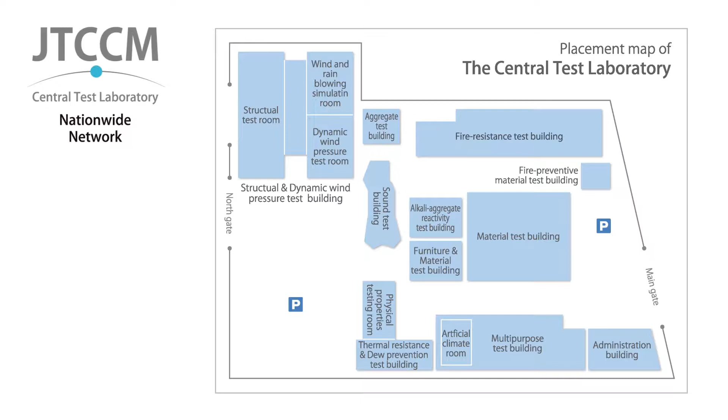There are several features of which we are particularly proud. One is that we conduct fair and highly reliable testing, the reason why we have been highly evaluated and trusted by our customers for such a long time as a third-party testing institution.

The second is that we offer a wide variety of testing options on our menu. We not only respond to customers with versatile requirements, but offer one-stop solutions through a quick response system and keen partnerships and cooperation with 4 specialized testing areas of materials, structure, fire resistance and environment.

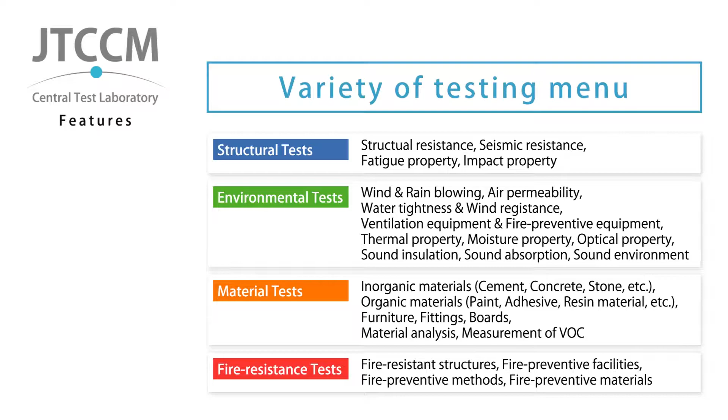The third is our reinforced testing facilities. As we have been required to conduct tests of larger and more diverse cases in recent years, we added a structural testing building and dynamic wind pressure testing building to meet testing requirements on an even greater scale.

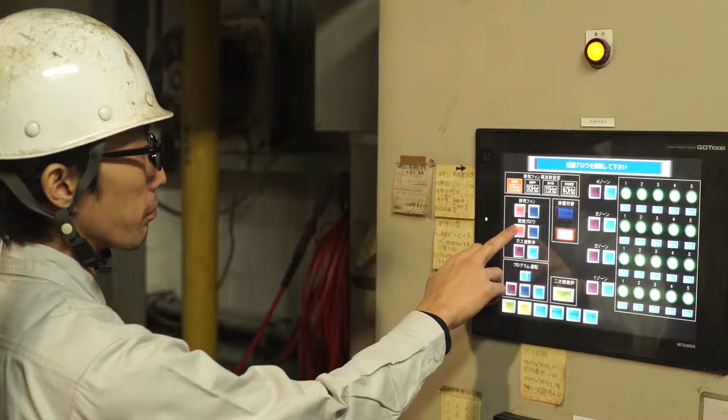Finally, it's about our skilled and experienced staff of engineers. They do their best to provide high-quality service by studying at various in-house training classes and for obtaining higher professional qualifications and academic presentations.

Next, let us guide you through our testing scenes, from the structural group, the environmental group, the material group, then finally to the fire resistance group.

The structural group deals with strength tests on large-size construction materials, components and joint components. In October 2016, we completed a new testing site, twice the size of the original one, and it has been in operation since April 2017.

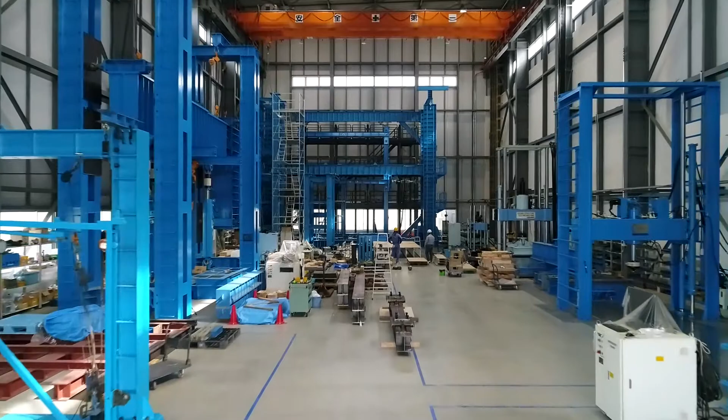We will introduce various strength tests on main structural members.

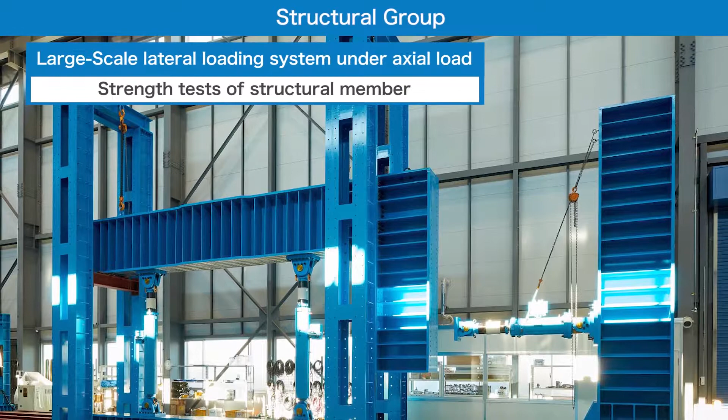The large-scale lateral loading system under axial load is used for structural members, joint components and frames applied to large-size buildings, such as reinforced concrete structures. A maximum of 5,000 kilonewtons in a vertical direction and 2,000 kilonewtons in a horizontal direction are capable of loads.

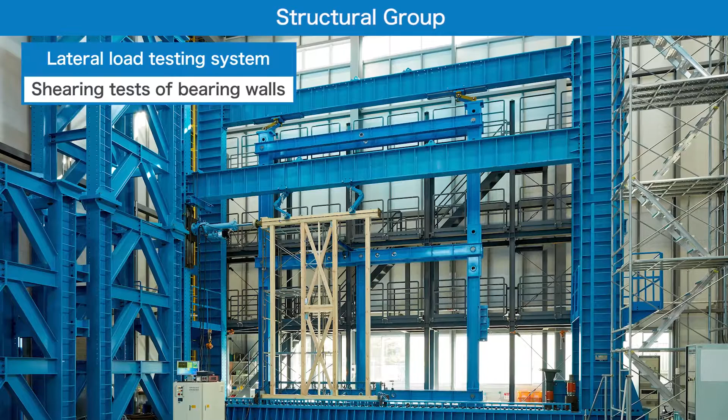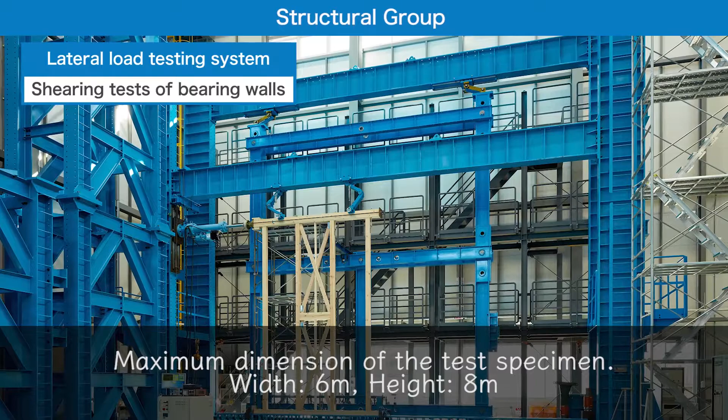For shearing tests of bearing walls over 3.3 meters in height, a lateral load testing system is used. It allows performance up to a height of 8 meters and a width of 6 meters. The horizontal load allows a maximum of 500 kilonewtons with static tests, while the dynamic tests allow up to 100 kilonewtons.

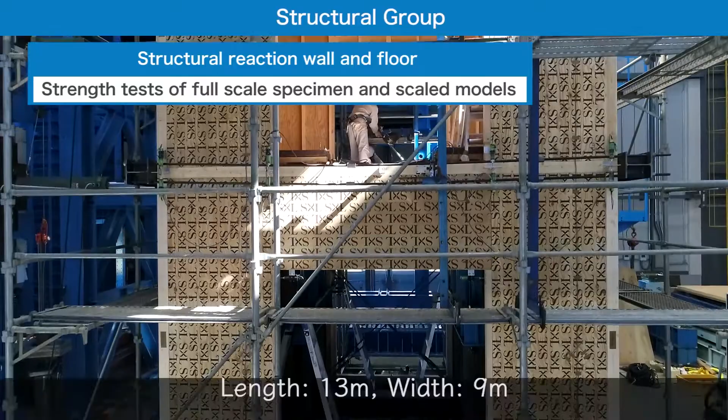A strength test on 2-story type of test specimens is performed using the structural reaction wall and floor. The structural reaction floors occupy an area of 13 meters by 9 meters. It can assemble reaction walls for various requirements by clients.

A testing system for wooden structures is used for shearing tests of wooden bearing walls requiring government certification. This testing system, due to its 3-dimensional structure frame, can be extensively used for horizontal pressure tests on ceiling units for compliance with technical standards on ceiling poles or handrails.

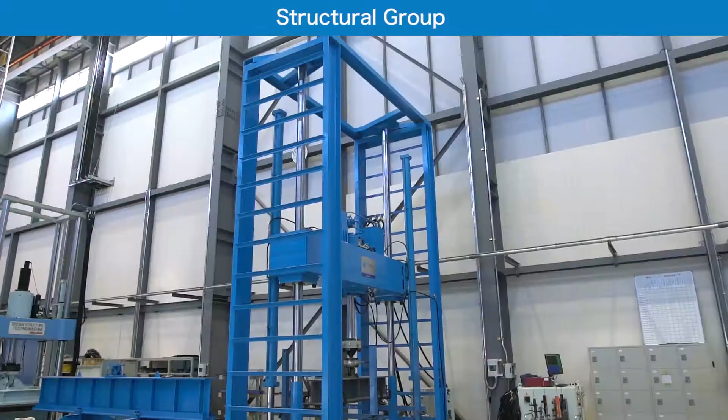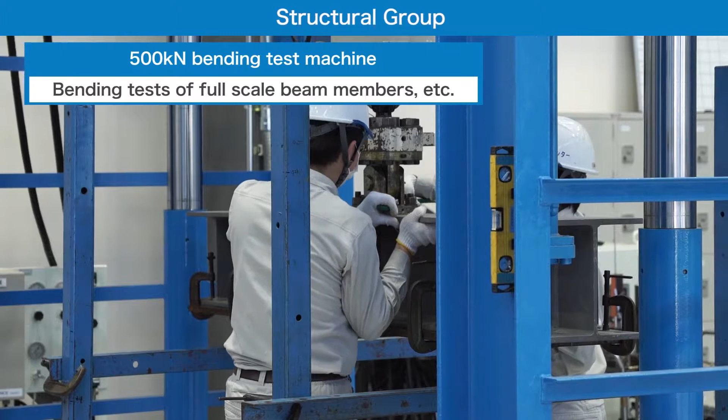A bending test of full-scale beam members, roofs, floors and wall panels is performed with a 500 kN bending test machine or 1000 kN structural test machine. The loading equipment houses a universal testing function so that it allows tensile tests on joint components and others.

A 500 kN fatigue testing machine is used for confirmation of fatigue properties such as tensile fatigue tests on steel bar joints or bend fatigue tests. It can also be applied to repetitive fatigue tests on dampers and various joint components.

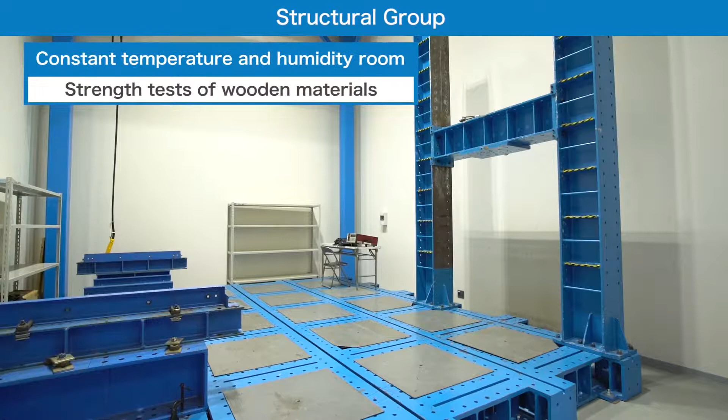A strength test on wooden materials and high polymer materials is performed in the constant temperature and humidity room, allowing standard conditions of temperature and humidity. A long-term load test can be performed on wooden materials as specified in the Building Standards Law.

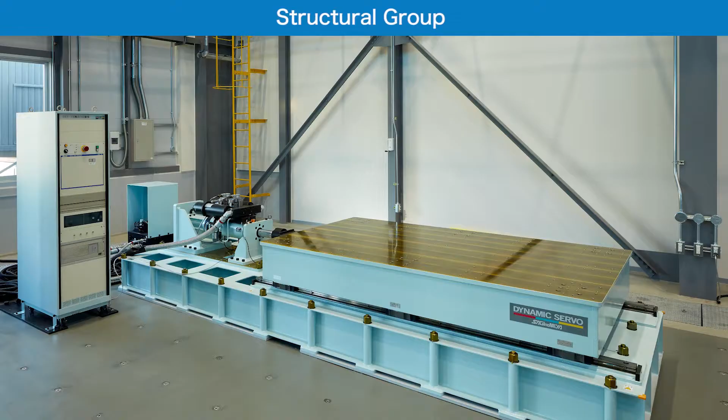Next, we will show you various safety confirmation tests for non-structural parts. A swinging pendulum impact test is performed in the shot bag testing frame for glass on the walls or adhesive films for window glazings of buildings.

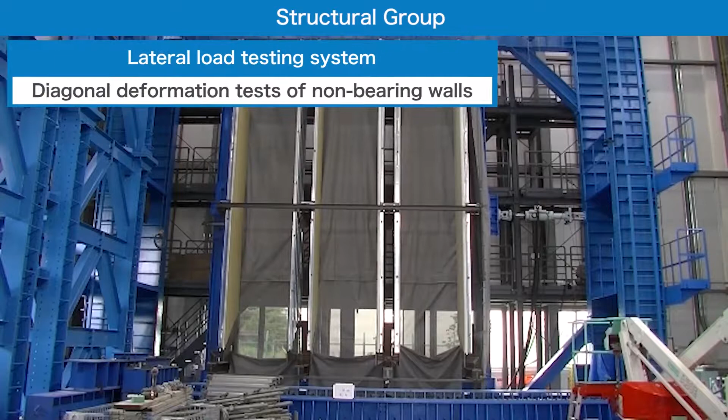The lateral load testing system is used for a diagonal deformation test of non-bearing walls, including external walls and partition walls. It can also conduct lateral dynamic tests in consideration of earthquake waves.

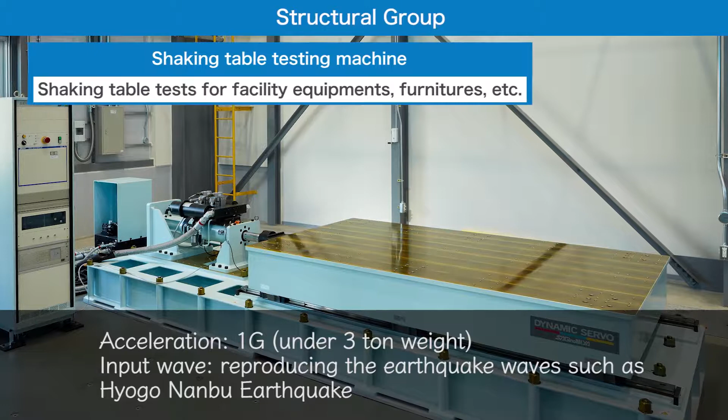A horizontal shaking table testing machine is used to test for confirmation of vibration characteristics and seismic resistance properties for raised access floors, furniture and facilities. It also performs shaking table tests in a horizontal direction at a maximum acceleration of 1 g by applying sine waves or earthquake waves.

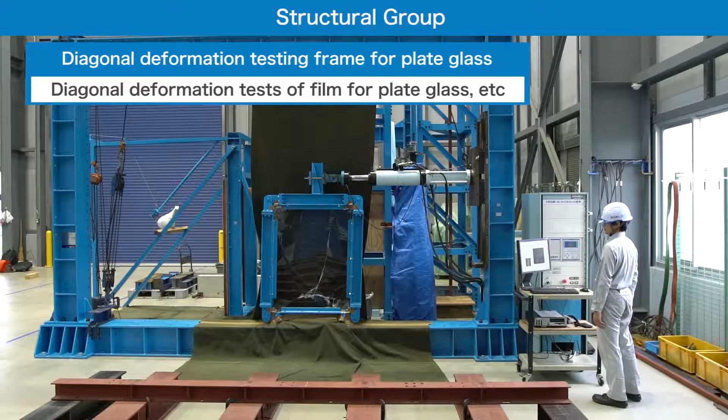A diagonal deformation test of the JIS compliant adhesive films for glazings and an in-plane displacement trackability test on door sets are performed by using a diagonal deformation testing frame for plate glass. It also performs horizontal load tests on handrails and guard fences.

The environmental group conducts tests on external natural environmental factors such as rain and wind, as well as indoor environmental issues such as heat, moisture, light and sound.

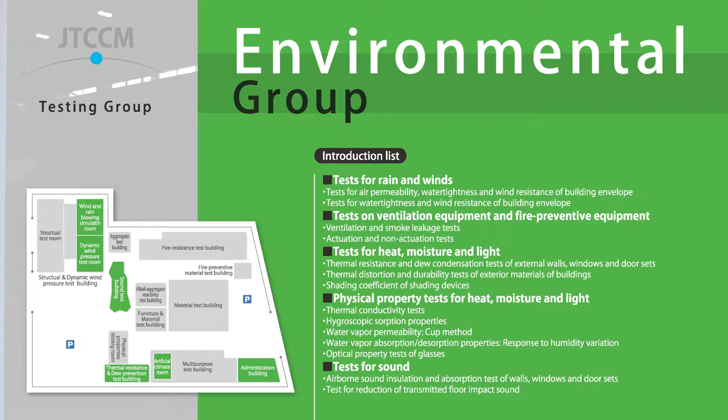In October 2016, we also built a new facility that allows tests with a natural external environment of wind and rain, thus allowing us to perform dynamic wind pressure tests with larger size test pieces than previously, as well as tests with actual winds. Let's start with the dynamic wind pressure tests on rain and wind.

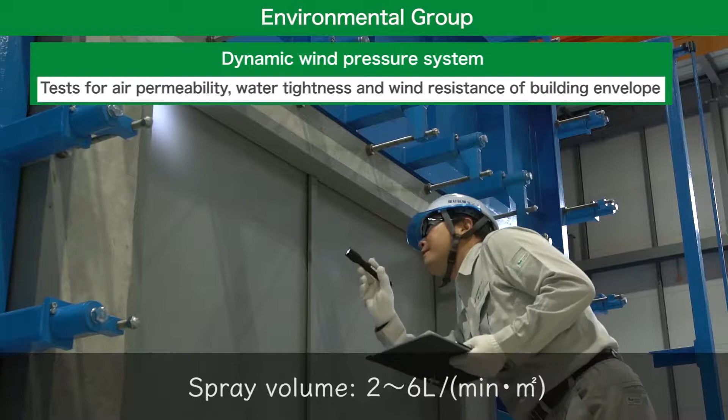The dynamic wind pressure system is used for tests for air permeability, water tightness, and wind resistance of building envelopes such as roofs, walls, windows, and door sets. A test piece of a maximum of 4 meters in height and 5 meters in width can be tested. A maximum of 10,000 pascals of load pressure will be applied, and the spray volume will be 2 to 6 liters per square meter per minute.

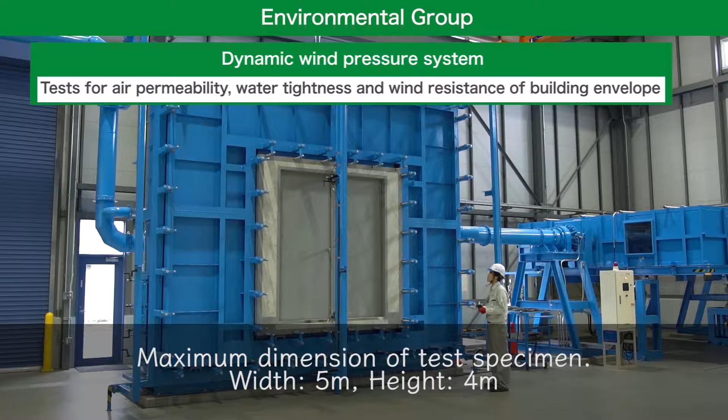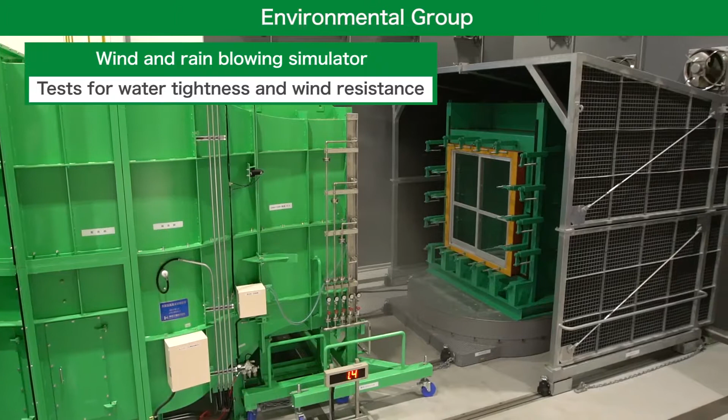Tests for water tightness and wind resistance are performed for actual winds over roofs, walls, building fixtures, solar light modules and fences using the wind and rain blowing simulator. This equipment can reproduce 3 different types of wind: steady, pulse and gust, with wind speeds that can range from 3 to 66 meters per second. The spray volume is 2 to 6 liters per square meter per minute.

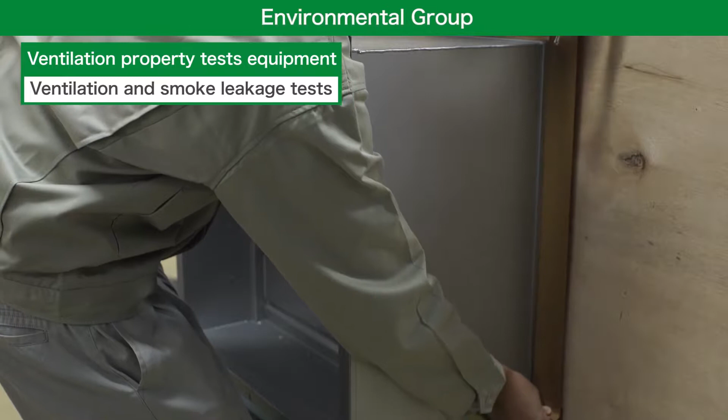Next are the tests on ventilation equipment and fire preventive equipment. For ventilation equipment such as exhaust fans and ventilation louvers, a ventilation property test is performed to measure the amount of ventilation by adding a constant pressure differential to both sides of a specimen.

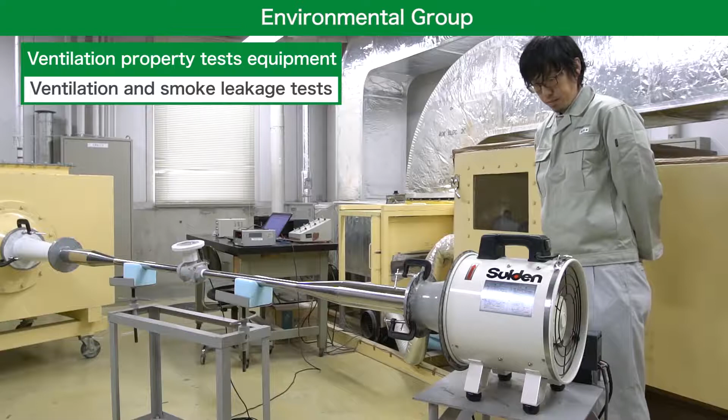For fire preventive equipment to be installed at a wind tunnel or a fire damper, tests are conducted to confirm the air leak amount at time of a constant pressure differential, and an operational status of the thermal fuse at the time of a specified temperature.

For large-size fire prevention equipment, like fire prevention doors or fire prevention shutters, the dynamic wind pressure system is used to measure the smoke insulation properties.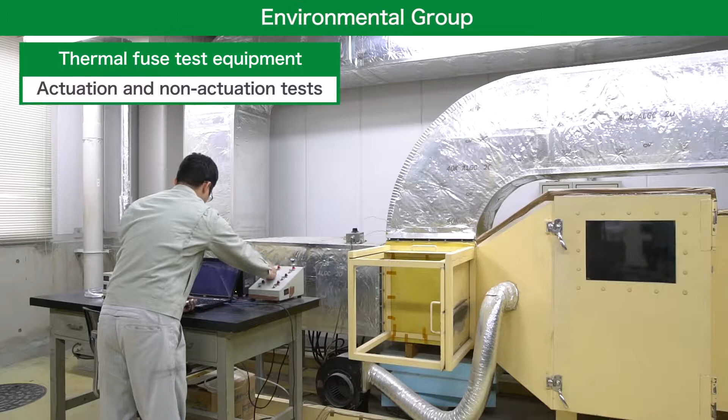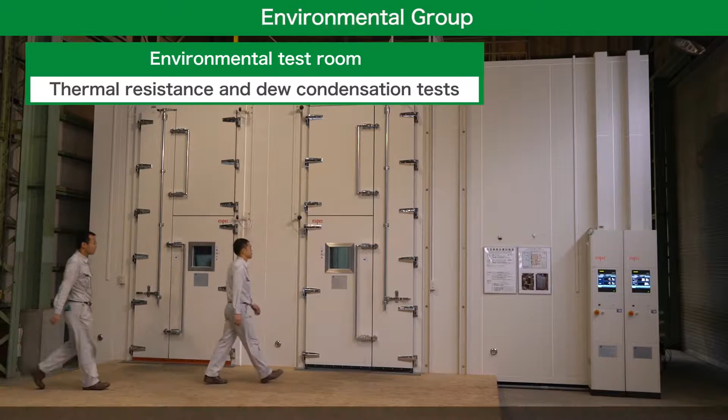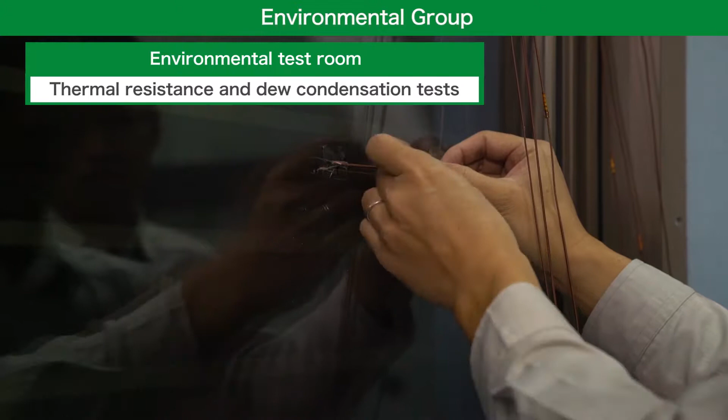Next are the tests for heat, moisture and light. Thermal resistance and dew condensation tests of building fixtures and external walls are conducted at the environmental test rooms of dual type to recreate the temperature and humidity environment both outside and inside the room. We have 3 environmental test rooms of dual type that are capable of controlling the temperature and humidity at a range of -20 degrees to 40 degrees Celsius in temperature and 40% to 90% of relative humidity. They can offer tests for a variety of temperature and humidity environments. They are also capable of testing for large-size fixtures over 2 meters high.

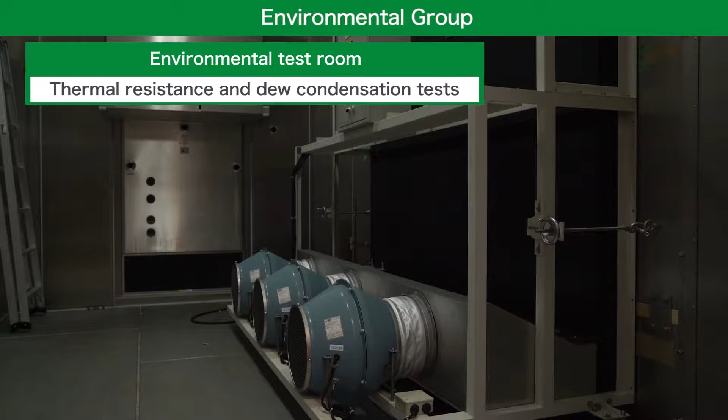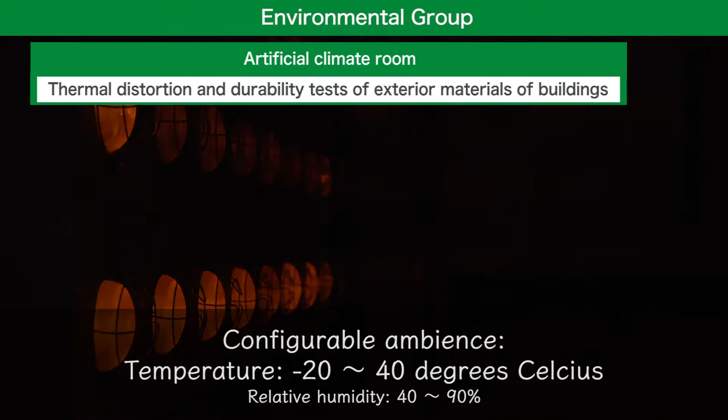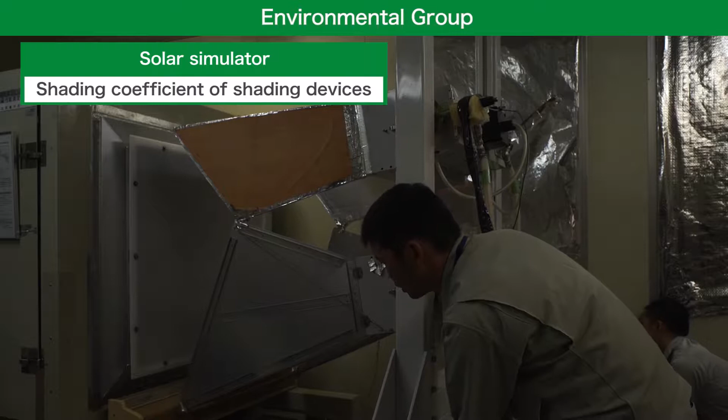Thermal distortion and durability tests of exterior materials of buildings are performed in the artificial climate rooms. This room is also identical with the environmental test rooms of dual type, allowing temperature settings from a range of -20 degrees to 40 degrees Celsius and 40% to 90% relative humidity. The outdoor chamber is equipped with infrared light and water spray nozzles, equipment enabling the solar beam equivalent heat and extreme changes of temperatures. A shading coefficient test for shading devices is conducted by using a light source capable of irradiating the solar light equivalent beams called the solar simulator. These are tests compliant with JSTM or JTCCM standard of testing methods enacted in 1995.

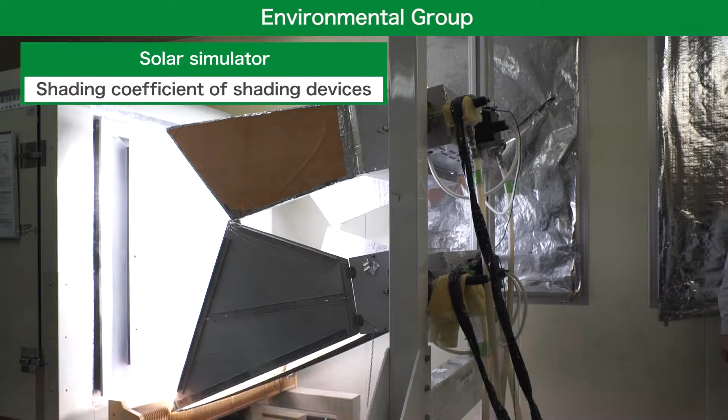This is a physical property test for heat, moisture and light environment.

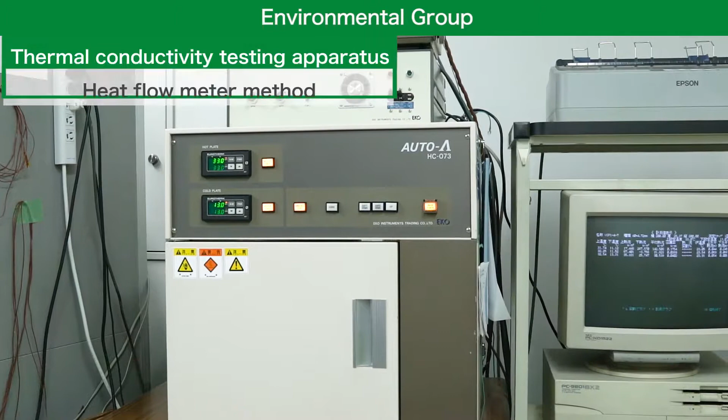A thermal property test room is used for thermal property tests of construction materials such as thermal conductivity, specific heat and coefficients of linear expansion. Among these, thermal conductivity tests are performed with 2 sets of instruments for the guarded hot plate method and 5 sets of instruments for the heat flow meter method, allowing for measurements at various temperatures and thicknesses of test pieces.

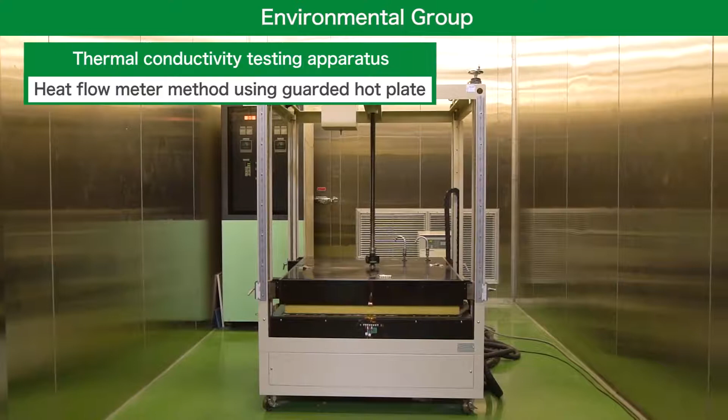Calibration test services are conducted here, as it is the only existing institution for thermal conductivity calibration in Japan.

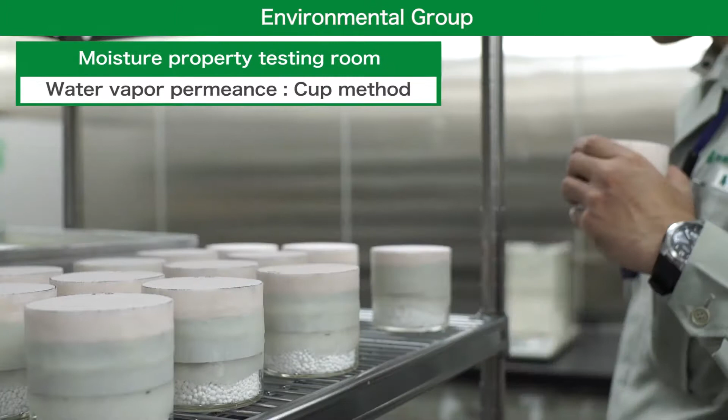The moisture property test of water vapor transmission, water vapor permeance, and hygroscopic sorption properties for general construction materials is performed in the moisture property testing room, which maintains specific environmental values of temperature at 23 degrees Celsius and relative humidity at 50%. In addition, related to moisture, a test of water vapor absorption and desorption properties is performed as well.

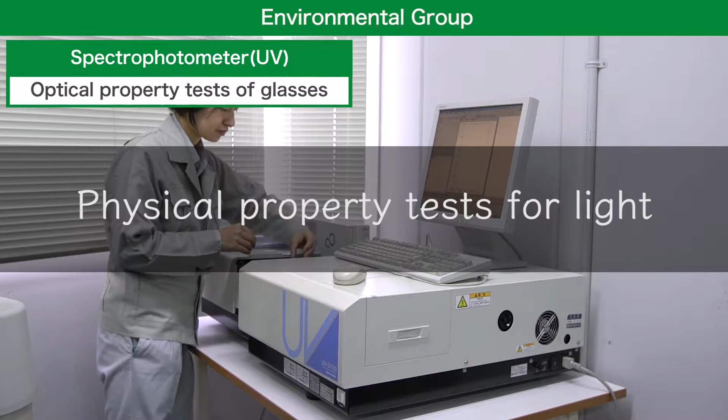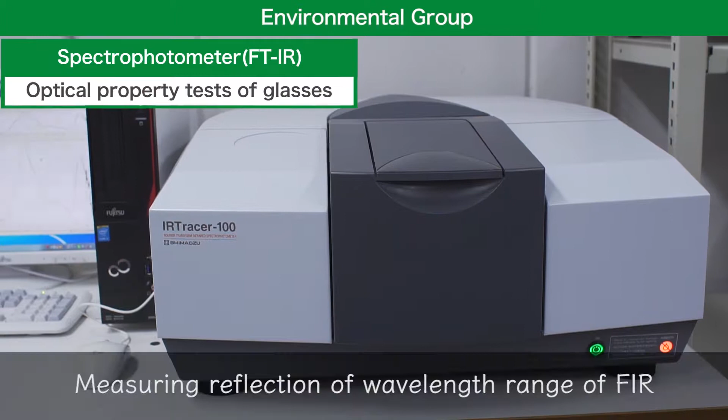An optical property test is performed on flat glass, window glass film and paint to measure reflectance and transmittance, emissivity and heat gain coefficients, using 2 kinds of spectrophotometers capable of measuring the wavelength range of solar radiation and far infrared radiation.

Now let us introduce tests for sound.

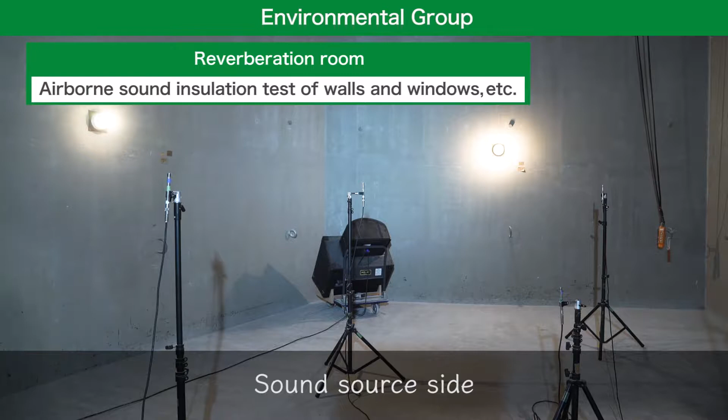A performance test of sound transmission loss is conducted using 2 adjacent reverberation rooms. Sound is generated by a speaker in the sound source room so that sound emanates from various angles toward the specimen. The specimen vibrates from incident sound, and the sound is radiated to the sound receiving room to the rear. Then the transmittance of the sound is measured based on the energy density of the sound in the sound source room.

In addition, in the performance test of sound absorption coefficient by the reverberation chamber method, we set the specimen in the reverberation room and measure reverberation time. Then the sound absorption coefficient of the specimen is calculated from the difference in the reverberation time measured under each condition with or without the specimen in the reverberation room.

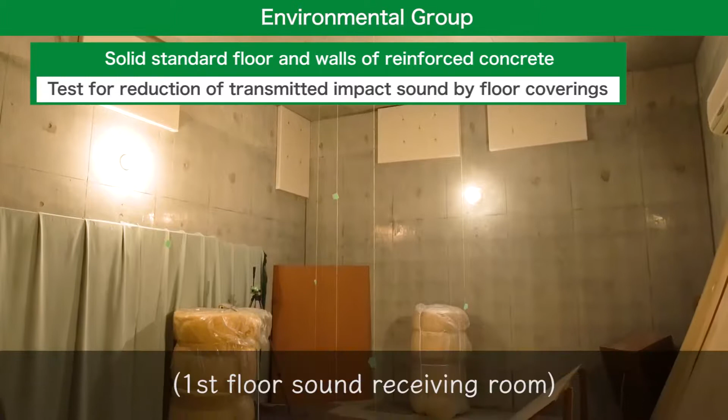A test for reduction of transmitted impact sound by floor coverings is performed using a sound source room and a sound receiving room of the solid standard floor and walls of reinforced concrete cast together. Impact is then applied to the specimen constructed on standard concrete floor according to the impulsive force characteristics of standard heavy impact sound source on the sound source room side, and the floor impact sound level is measured on the sound receiving room side to calculate the amount of reduction.

The material group is compatible with various building materials, ranging from mortar and concrete materials to polymeric materials, furniture and fittings. In addition to JIS, or Japanese Industrial Standards, we are also testing compliance with specifications such as NEXCO, or Nippon Expressway Companies, Urban Renaissance Agency, the Architectural Institute of Japan, and others.

First of all, we will introduce tests for inorganic materials.

The mortar test is conducted as quality control of cement, mixing water, and admixture, which are the materials of concrete, and a physical property check of mortar for repair and mortar for finishing.

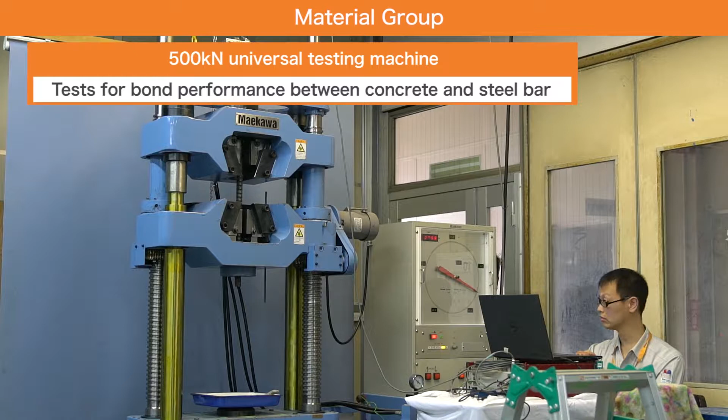The bond performance test between the concrete and reinforcing bar is a test to check bond performance by pulling out the reinforcing bars cast in the concrete.

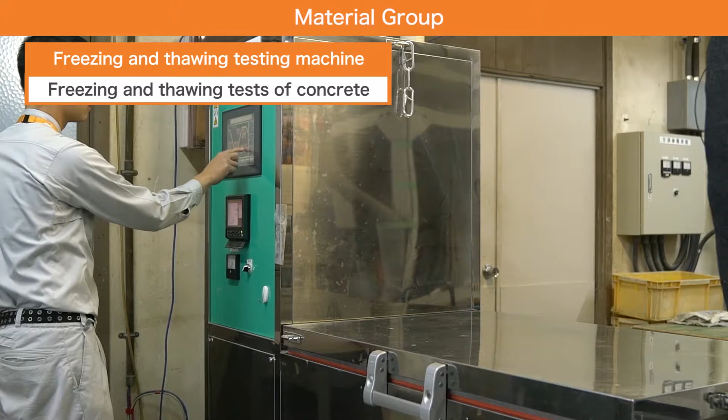The freezing and thawing test is designed to repeatedly apply freezing and melting actions of water to concrete and examine deterioration conditions. The compression strength test of stones is a test to examine the compressive strength of stone used for finishing materials and rough quarry stone using a compression testing machine.

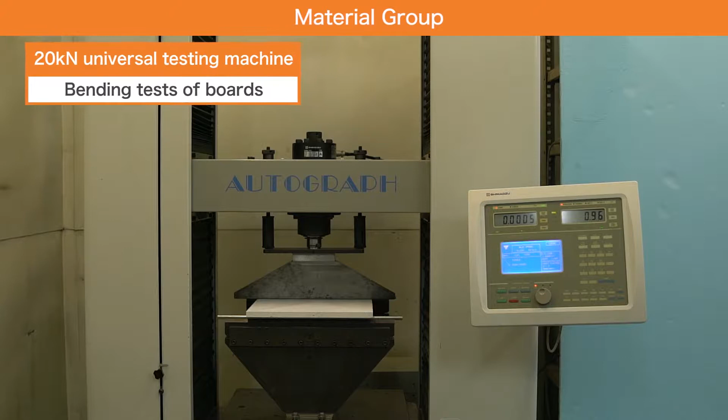The board bending test is designed to check bending strength of boards used in the interior and exterior of houses. A universal testing machine is used for this test.

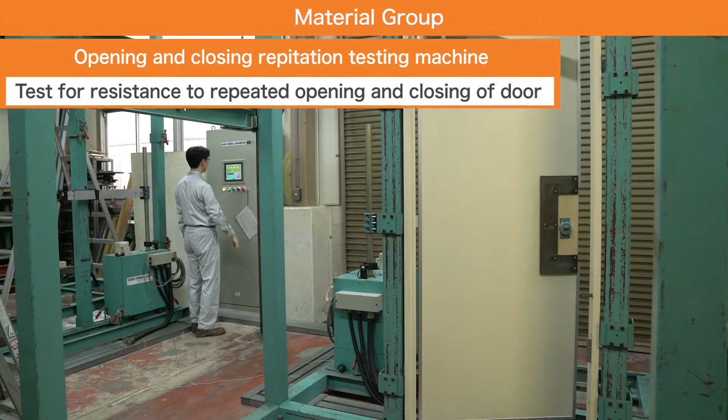In the test for resistance to repeated opening and closing of doors, the test is performed to measure opening and closing resistance after a specified number of repetitions and to confirm the opening and closing movement.

The next is about tests for organic materials.

In the strength test of polymer materials, we use an electromechanical universal material testing machine because the target materials are diverse and small load measurement is required. Further, by using it in combination with a temperature chamber, it is possible to conduct a strength test in low and high temperature environments.

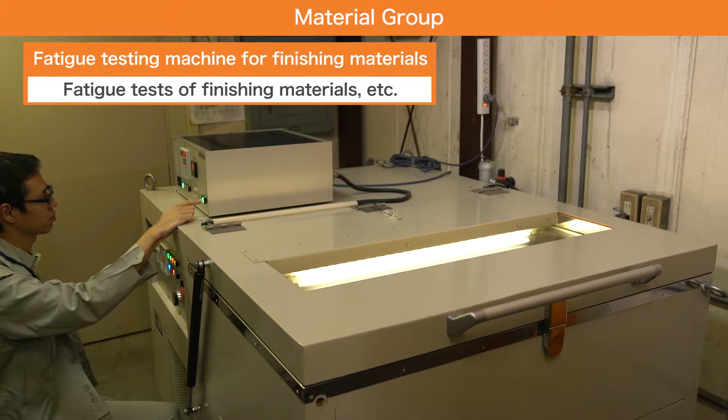The finishing material fatigue testing machine is used to examine the trackability performance of finishing materials and waterproof materials against the deformation of the base repeatedly caused by temperature change and vibration.

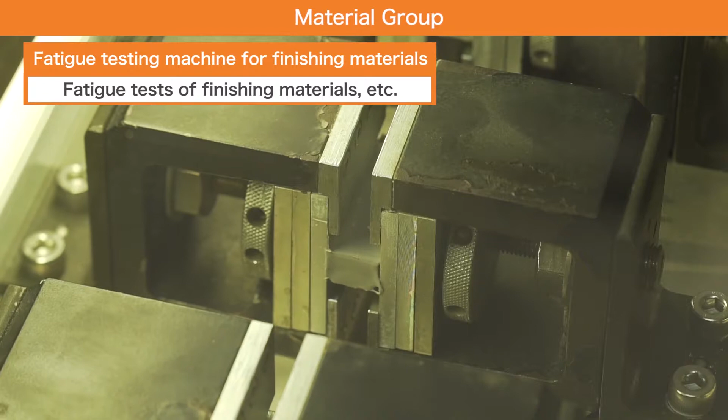The fungus resistance test is designed to investigate hypha growth by inoculating fungi on interior materials and the like. For fungal-prone materials, measures such as using antifungal agents are required.

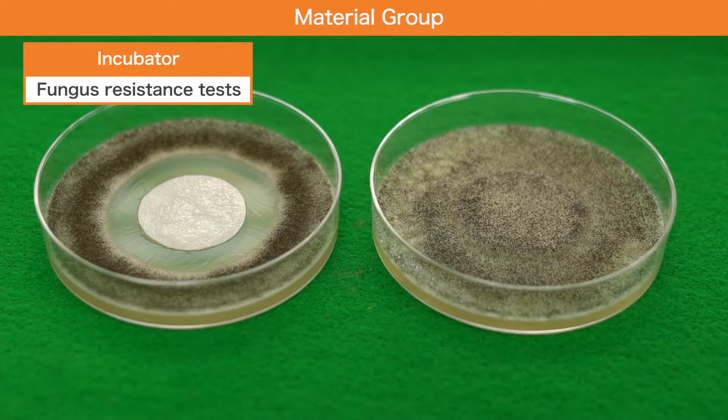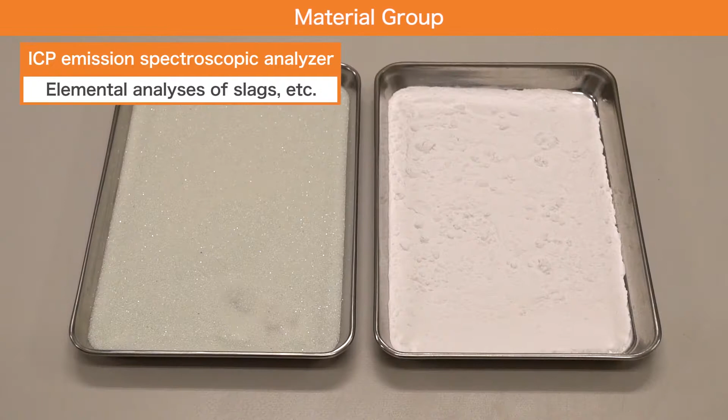Lastly, let us talk about a test related to material analysis. This is a test to examine what elements are included and their corresponding amount in materials such as slag and glass beads. This inductively coupled plasma, or ICP, emission spectroscopic analysis, is an analytical method that can quantify several kinds of elements at a time, separating the light emitted by spraying into high temperature plasma, thus testing qualitative analysis from the wavelength and quantitative analysis from the wave intensity.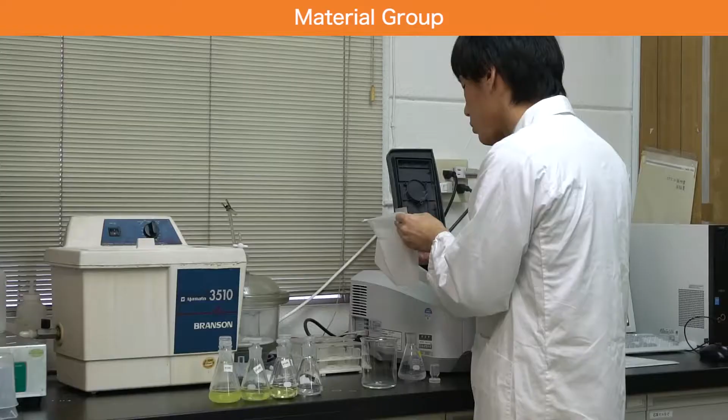The determination of the emission of formaldehyde is a test to measure formaldehyde emitted from interior materials and their adhesives. There are two kinds of test methods, the desiccator method and the small chamber method, used depending on the target materials.

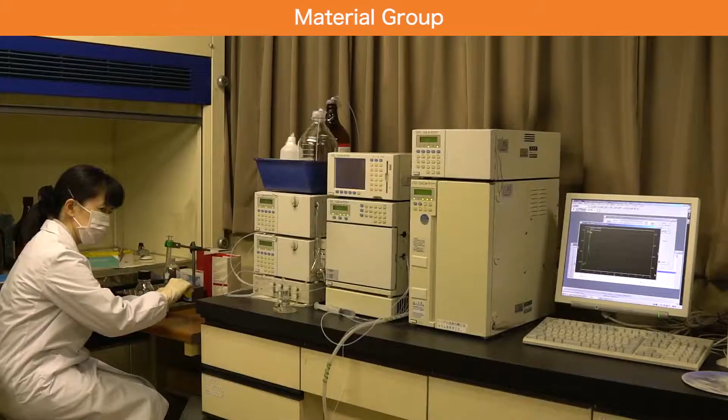In the material group, we also conduct various tests targeting both inorganic and organic materials.

As a designated performance evaluation institution based on the Building Standards Law, the Fire Resistance Group tests and evaluates a variety of fire prevention issues related to structures, facilities, methods, and materials. We also conduct flame spreading tests on fire-resistant materials and tunnel repair materials such as building facilities.

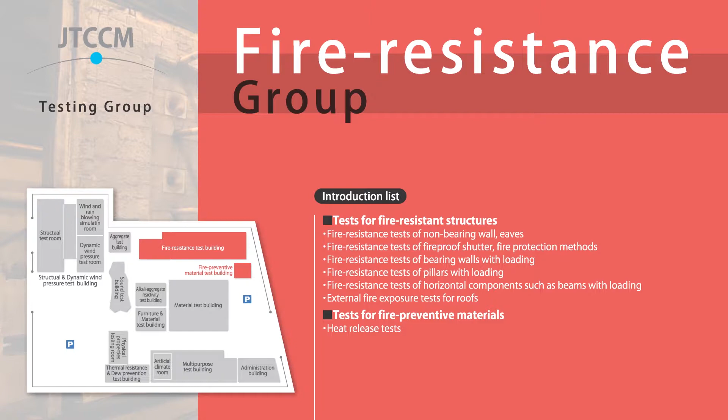First, we will introduce tests on fire-resistant structures. These test results are mainly used for performance evaluation concerning fire resistance and semi-fire resistance performance, fireproof performance, flame interception performance of pipes and fire doors, penetrating walls and fire doors.

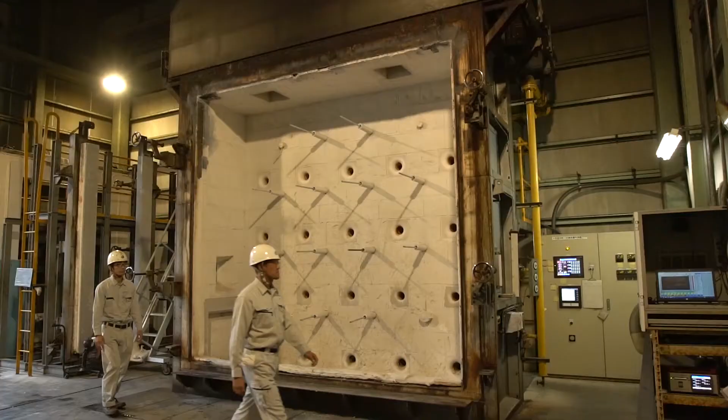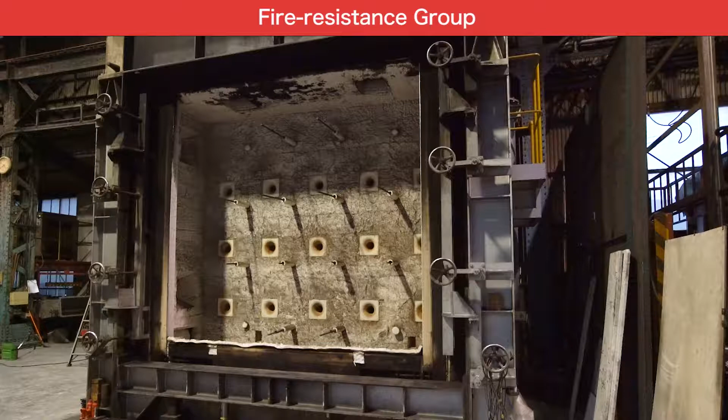Using a vertical furnace with loading device, a fire resistance test can be performed by heating while loading the load-bearing walls of various wood structures and steel structures.

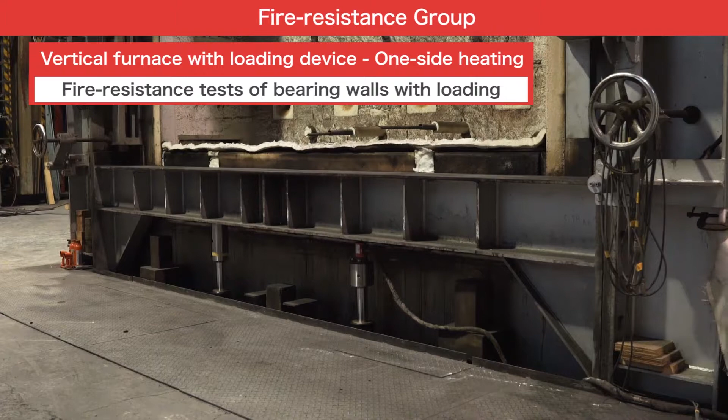In the fire-resistant tests of pillar, heat can be applied while placing a vertical load on the wooden and steel pillars of various structures, or synthetic pillars, including walls.

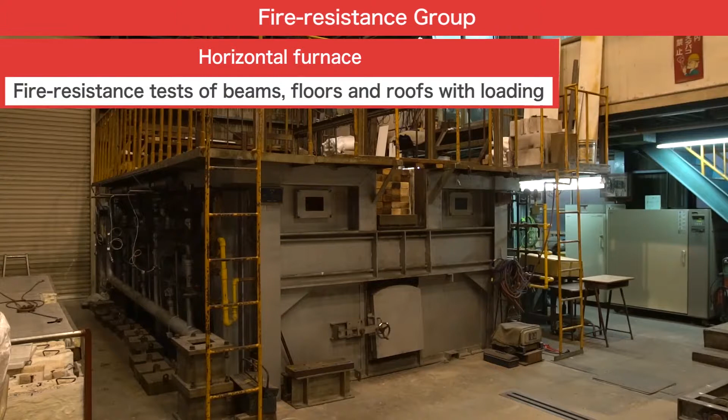The fire resistance tests using a horizontal furnace can be carried out by heating under loading the comprehensive horizontal materials, such as beams, floors and roofs of various structures.

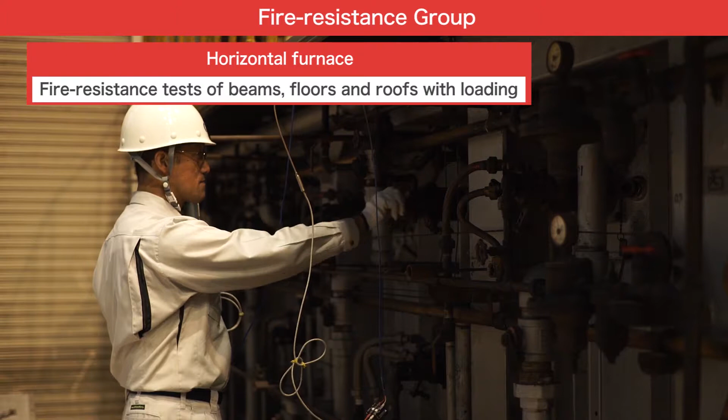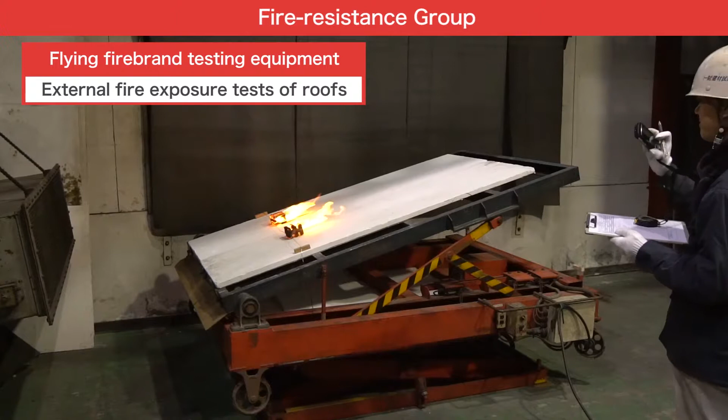This test is an external fire exposure test for roofs. It allows us to check the fire expansion and integrity of roofing against spot fire. The test results are mainly used to evaluate the performance of roofing, assuming urban area fires and so on.

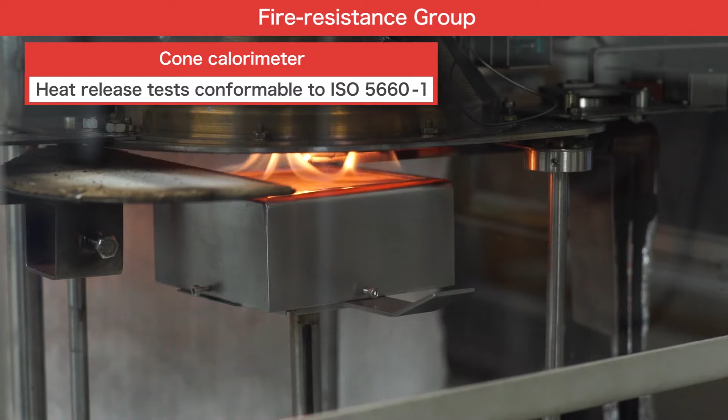Lastly, in the heat release test, it is possible to check the combustion properties of wallpaper, film and boards that are subject to restrictions on interior finish. The test results are mainly used for evaluating the performance of incombustible, quasi-incombustible and fire-resistant properties of building materials.

We have mainly introduced our focus on testing, but we are also engaging in a variety of other roles, such as technical assessment, performance evaluation tests, and product certification tests.

Technical assessment is a task that takes full advantage of the experience, engineering capability, and fairness as our third-party central test laboratory. Here we achieve comprehensive evaluation of quality maintenance and management, construction methods, and environmental impact, other than various required quality assessments targeting newly developed products, construction methods, and engineering systems which are not covered by any technical standards.

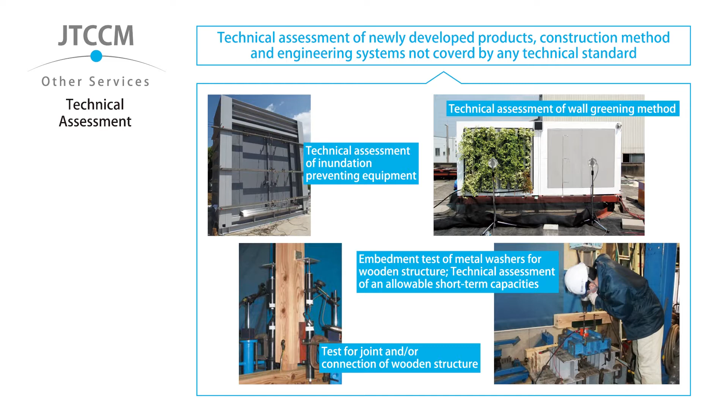Performance evaluation tests: building materials and components require performance evaluation and type approval according to various regulations, including the Building Standards Law. We at Central Test Laboratory conduct performance evaluation tests in collaboration with the Quality Assessment Headquarters to complete such tests. In addition, we at the Japan Testing Center for Construction Materials also carry out JIS Mark certification of products and processing technologies in the fields of civil engineering and manufacturing.

To fulfill this task, fair and impartial quality tests by a third party are required. The Central Test Laboratory works in cooperation with the Product Certification Headquarters to conduct tests and successfully complete this mission.

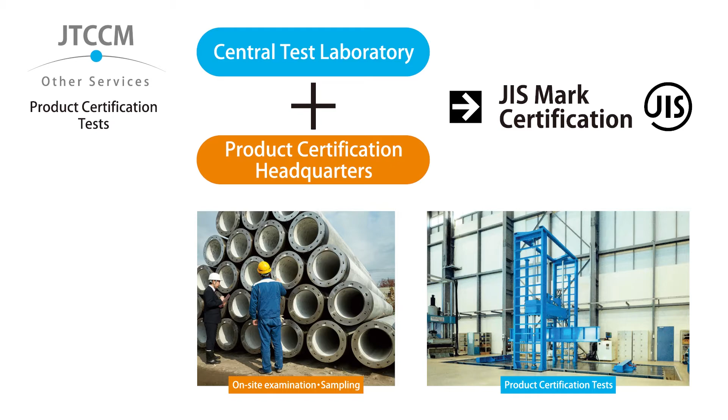The Central Test Laboratory has been accomplishing great things for more than half a century. To conclude, here are some messages from our associates.

We value our communication with customers and are doing our best to propose new test services that meet their needs.

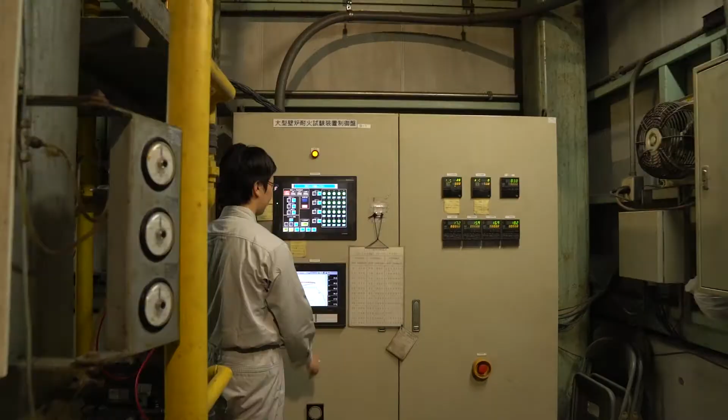Our job is not just to test according to JIS, academic standards, etc. I believe our strength is that we can respond in a flexible manner to the requirements, backed by our high level of expertise and technical capabilities as professionals.

As a third-party testing institution, we continuously accumulate expertise day after day in order to deliver highly reliable and accurate test results.

We have cultivated reliable communication with every single one of our customers for more than 50 years. We are extremely proud of that. It is a secure social foundation that can be handed down to the next generation.

In order to realize this vital mission, we at the Central Test Laboratory promise to continue to grow with our customers.